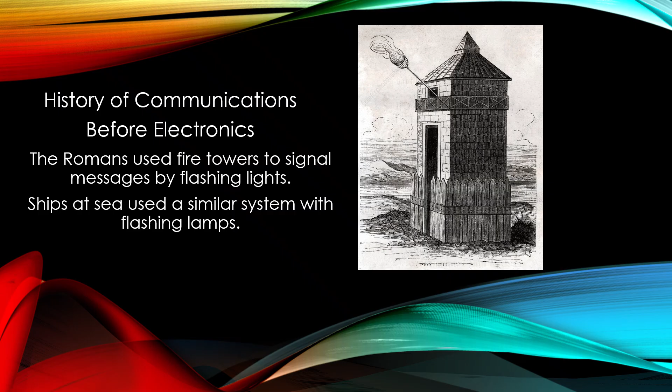Then the other guy would put his flame down and open up the water spout, so the water would start to drain and the post would start going down. When it got to the message he wanted, he would hold his flame up again, and the other guy at the other end would shut his water off. That way they could read the message, like we're okay, we need help, or whatever the message happened to be - they had several messages on there.

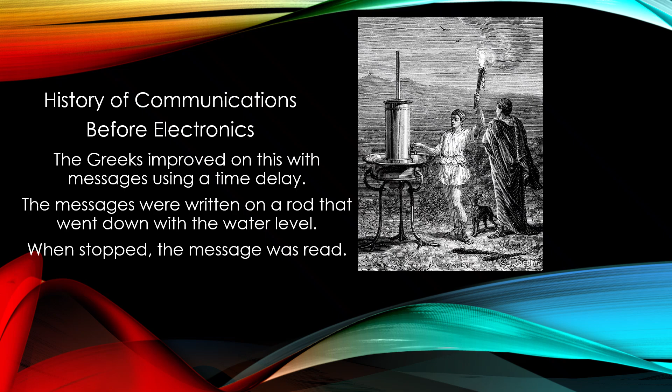Communications in ancient West Africa.

As a young boy growing up in New York, my neighbors came from Ghana, Africa. I liked to go over to their apartment and learn about the culture. They had some interesting drums that I liked. One day I was playing around with one and the husband said, 'Hey, he almost played a perfect six.' I thought, how can a drum be a number? And he taught me about talking drums, how they could communicate 5 to 8 kilometers with them. I never forgot what he taught me.

In Ghana, the Akan culture uses the fontomfrom, or talking drum. These could be quite large, like really large. Now they're doing some kind of festival here, and they're vertical. In actuality, the drums would be more simplistic. They'd be horizontally mounted, pointing toward where they want the sound to go, and both drum heads would be the same height, so the person could play the high and the low as they needed to communicate.

This started in Nigeria, went to Ghana, went to Benin, then to Mali, and moved across the country, and it was their main tool for communications for centuries. After that, it went to Afrobeat and jazz and contemporary music, and now it's more of a festival type of thing. I don't think they still use it for communications anymore, unless they're doing a reenactment or they want to show people how it works.

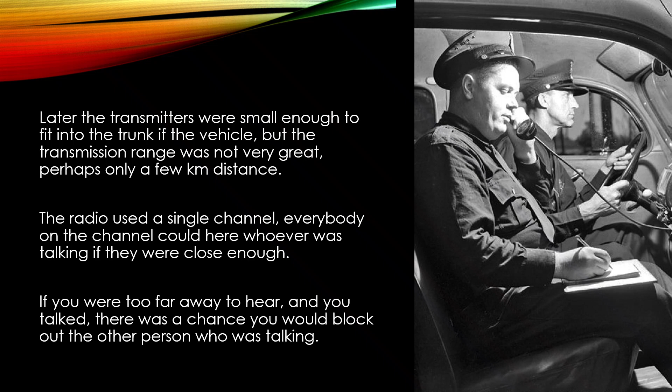Later, the transmitters were small enough to fit in the trunk of a vehicle, but the transmission range was not very great, perhaps a couple of kilometers at most. The radio used a single channel. Everybody on the channel could hear whoever was talking if they were close enough. But there's a problem: if they were too far away from one of the persons, they might not hear them, and when they talked, there was a chance you would block out the other person who was talking.

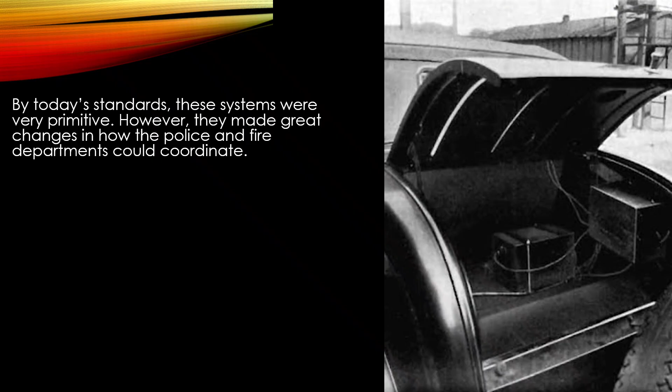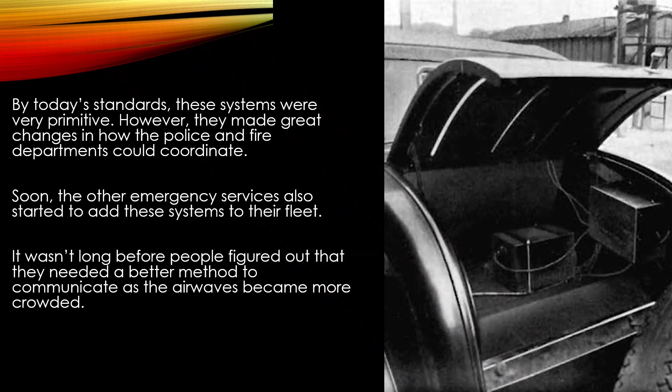By today's standards, these systems were very primitive. However, they made great changes in how the police and fire departments could coordinate. Soon, the other emergency services also started to add these systems to their fleet. It wasn't long before people figured out that they needed a better method to communicate as the airwaves became more crowded. It was determined that if frequencies were paired together, a new method of transmission could be used.

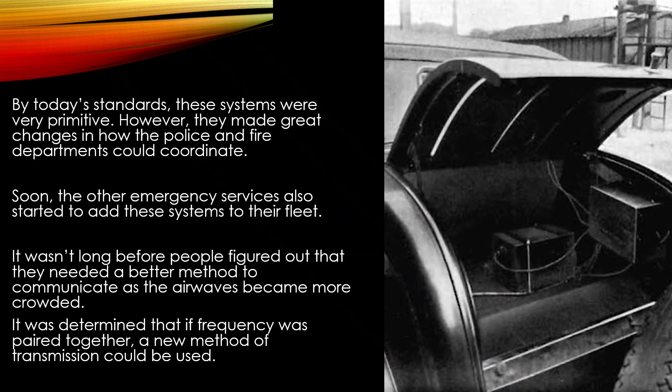Two-way radio communications use individual transmit and receive channel pairs. So we got signal pairs for better communications now. Instead of a single frequency radio, it evolved to have a transmit channel and a matching receive channel.

So you had a nearby town, and then you had some different town, and you wanted to talk back and forth. It was very possible that if you were here in the nearby town and trying to talk to the person in the other town, they wouldn't be able to hear it. So they have a transmitter, a big tower. What it would do is listen on one channel and broadcast on another. Then when the other person talked, he would broadcast on that listen channel, and it would broadcast it on the talk channel.

So the first car goes in and he makes a transmission. It's received by the tower on the receive channel. It's transmitted out on the transmit channel at a much higher power. This allows communications over a much larger distance with more clarity.

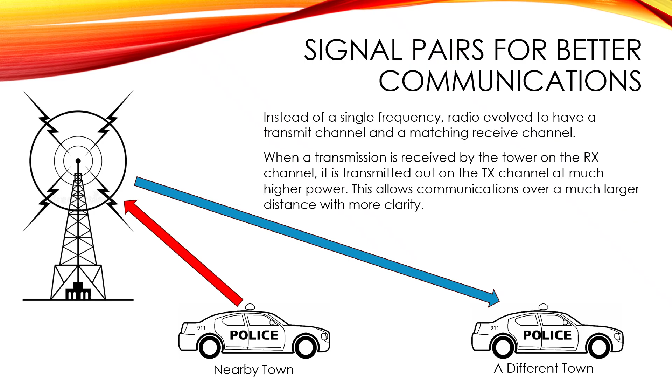When the car that's far away responds, the tower is very high and has very sensitive electronics on it, so it hears the transmission on the receive channel very clearly. Then it retransmits the signal on the transmit tower where both cars hear, and far can easily hear the communications. This is a better way to send the signals out.

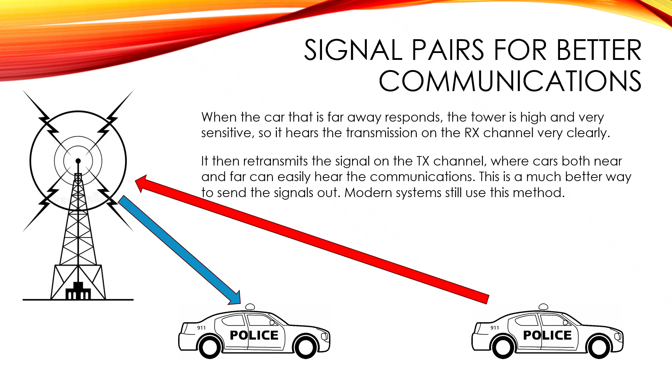Modern systems still use this method. So if you've got multiple police cars in one town and multiple police cars in the other, they can all talk back and forth as though they were close to each other. This requires one radio for the police, one radio for the fire, one radio for the EMS. It's a lot of radios. Bear that in mind, it'll become important later.

Modern radio systems can now transmit audio as digital information, which means it can be encrypted. This makes the communications private, so only the person or group that's supposed to hear it can have access. This is very important in the government, military, and police units. Fire and ambulance units also use encryption to prevent agencies like the news from releasing information that's private or confidential.

So if there's some politician or actor or something like that who's got a problem, they may not want everybody to know about it. They don't want the news to be able to listen in on their communications and hear what's going on. Obviously, you don't want the bad guys with a scanner to be able to listen in to the police and say, oh, they're two blocks away, we still have time. So now they have digital encrypted audio, which means there's a lot more safety involved for everybody using the system, and it's a lot more private.

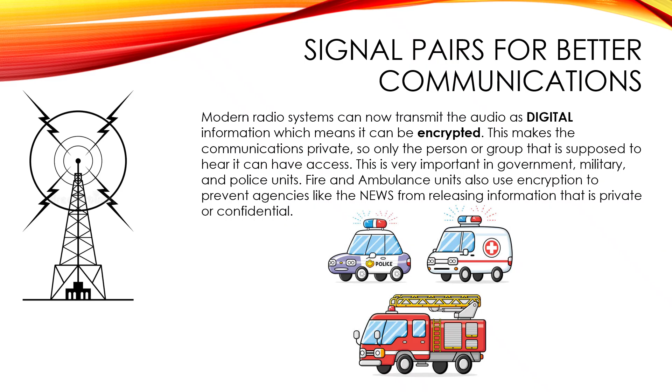Now we're going to talk about trunking radio systems, using a computer system to control radio traffic. So imagine this: you've got a couple of different radios, radio transmitters, and what happens if one of them breaks? If it's the police, for example, now all of a sudden they don't have their communications. That could be a big problem. Let's look into that.

We've learned that radio evolved to have a transmit channel and a receive channel as a working pair. But think about what would happen if the police radio failed. They would not have communications. The other departments would be able to talk, but the police would have a serious disadvantage. Another consideration is that one agency might be very busy, while another agency is currently just sitting there idle. The other channel would have been very useful if both agencies could somehow share that resource, especially the police department that has a broken radio right now.

It would also mean, in the event of a failure, the calls could be routed through the functional radio and they wouldn't lose the communications.

So let's take a look at the basic concept. This is a modern radio system. This is what a single modern radio transmitter looks like. It contains a power supply, a processor, receive circuits, a transmitter, and a power amplifier. It's a very powerful unit capable of between 50 to 150 watts of power. A standard portable radio, for example, is typically 2 watts, and that'll give you a comparison.

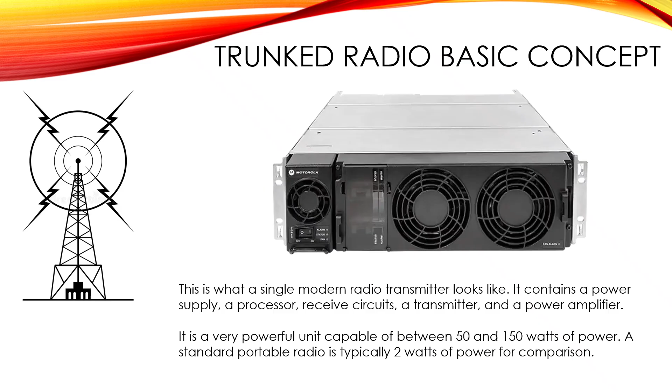Now let's look at the rack. This one is a Motorola rack, and I do a lot of work with them, but there are other vendors that are slightly different, though they have the same basic components.

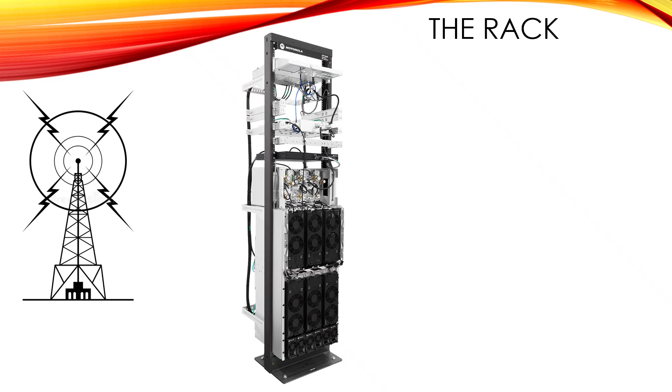That's the rack. You've got a receiver multi-coupler. When the signal comes in from the tower, this has an amplifier to amplify it up and clear it up. You've got a duplexer and mixer, transmit circuitry and receiver circuitry. They've got to be mixed together for when it gets sent back up the tower.

You have a controller. It handles, like a traffic cop, the traffic between all these different units. You have a combiner. Below, you can see there are 6 big radios, and it takes the signals from each one and mixes them together so they can use that single antenna on top of the tower. And these, of course, are the repeaters.

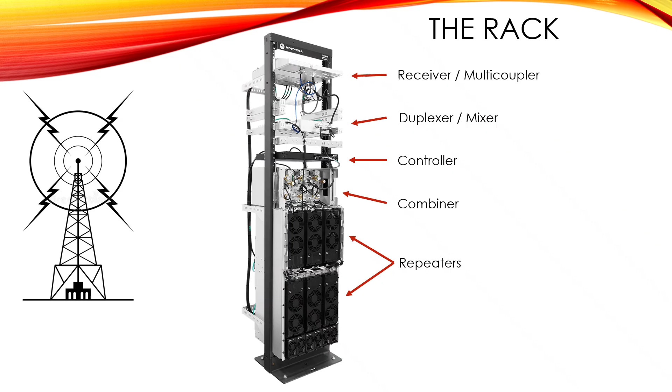Those are the power supplies for the repeaters. They all connect up to the tower, and the radio communications go back and forth through the cable into the rack.

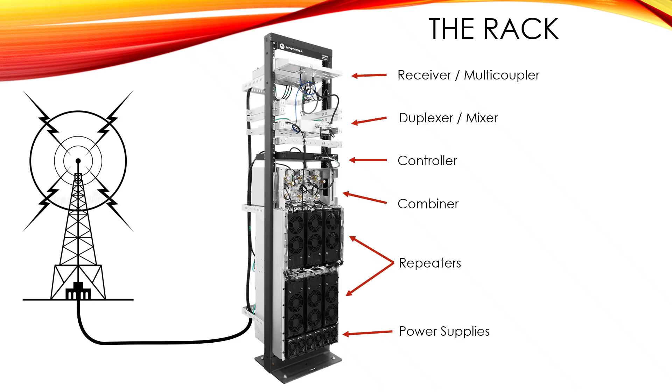Now, some sites have more than one rack. You can have as many as 21 channels for one system at one location. Let's look at how it works.

When the radio is turned on, it looks for a control channel and affiliates with that site. You've got a certain number of channels at the site, and one of them is designated as a control channel, and it sends out a signal that basically says, I am system number 1234, I am here. The radio is familiar with the control channel, so it logs on and says, I know what tower I'm next to, I know how to communicate with this tower.

During communications, it's no longer locked to a single channel. It's not like the police have a channel and the fire department has a channel and so forth. They all share all the channels now, and what they do is make talk groups. So let's say police might be number 200, fire might be 300, and so forth.

If you wanted to talk to the police, which was group 200, your radio would, when you keyed it up, say, hey, I'm unit number 45680, and I want to talk to the police on talk group 200. The controller sends a command that says, okay, everybody in group 200, somebody wants to talk to you now. Go to channel 3, because channel 3 wasn't being used.

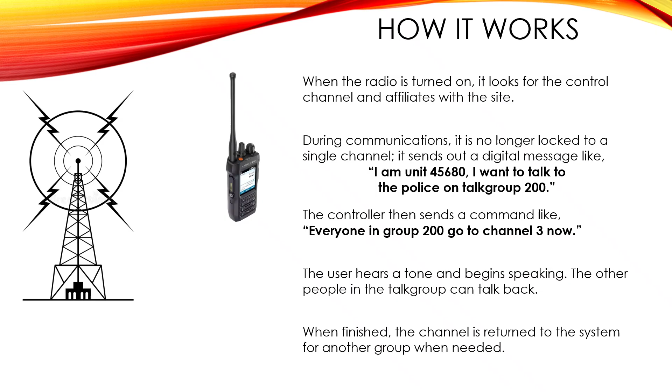Now let's look at a distributed antenna system. What is a DAS and why is it important?

You probably realize that if you have a large building made out of brick, stone, and concrete, it's going to block some radio signals.

If there's poor coverage in a structure, in an emergency, people may be injured or killed if first responders can't get to them and if they cannot communicate properly. Imagine, for example, a firefighter who gets pinned under a fallen piece of the building. They can't move, it's hard to see, and there's smoke everywhere. If they do not have the ability to call for help, and if help can't communicate, the person may lose their life.

My job is to prevent that from happening. We need to design a system to prevent that from happening.

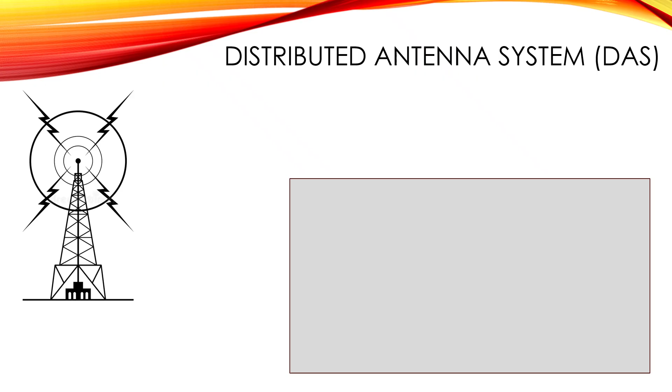So distributed antenna systems, also known as DAS. Let's start off with a building. Pretend it's some big courthouse or a school or some place that's very important to us that's going to have a lot of people in there. And when we test it, we go in there with a radio and it just does not work. We need to do something about that.

Well, the first thing we do is we put in what's called a BDA. That's a bidirectional amplifier. It can take the signal from the tower, amplify it, filter it, and then send it out. And it can also take the signal from inside the building, amplify it, filter it, and send it back.

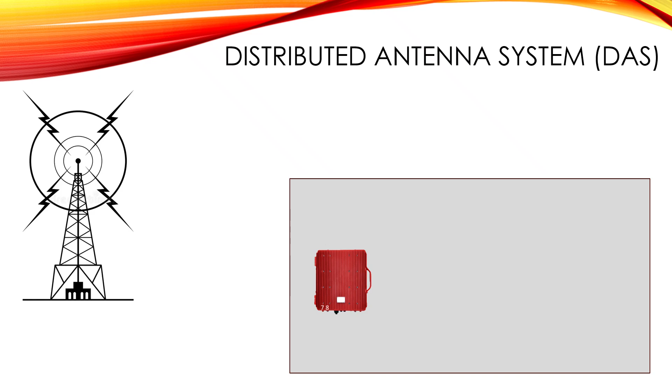But we need some other stuff to make it all work. So we run a cable up toward the roof, but we think, wait a minute, if we put an antenna out there and lightning hits nearby or something, that pulse of energy could come in and destroy our equipment. Let's put a surge protector in there to stop that from happening. Make sure it's grounded. Now, if you get a surge, it's not going to get in.

Then we're going to put an antenna up on the roof. And this is not your regular antenna. You see how long it is? It directs the signal like a beam, like a flashlight beam, because we don't need it going everywhere. We need it to go to the tower. We need as much of the signal as we can to go to the tower. We also need it to be the most sensitive in the direction of the tower. We don't want a lot of radio signals from other directions getting in here.

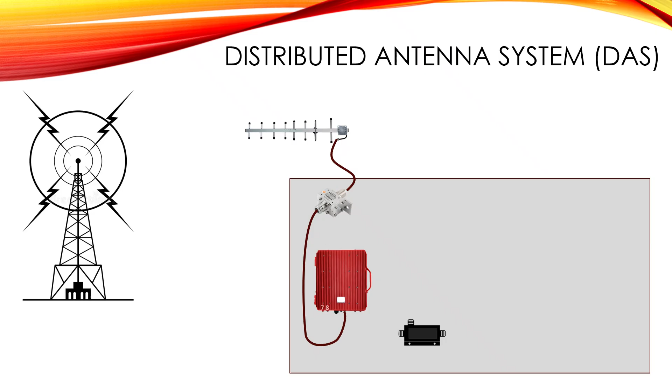So we connect that up. Now we're going to look at the output. Well, we're going to have more than one antenna. In here, let's say we have two antennas, so we're going to need something to split that signal up. We use something called a directional coupler. They're kind of interesting because they can send a certain amount of power out one port and the remainder out the other. Imagine if you had a big gymnasium and then you had a small office. You would need more signal for that big gymnasium than you need for that little office. So we can use these to determine the correct amount and make sure it gets where it wants to be.

We hook that up to the amplifier, the signal comes in. We say, okay, we're going to have one of these located in the office, one of these located in the gym. Let's wire them up. So now you've got our distributed antenna system.

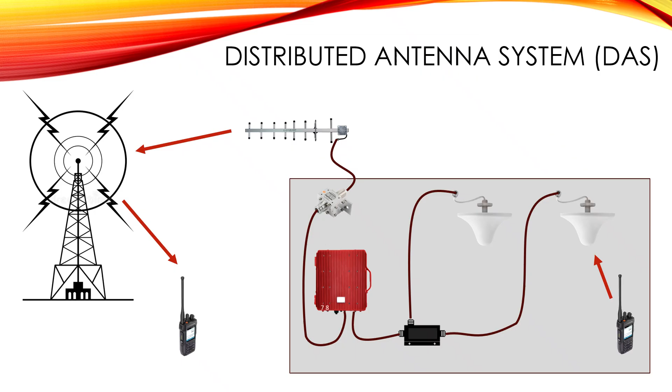The user comes in and he needs to talk. Well, before he couldn't talk, remember? There's somebody outside he needs to talk to. But now the signal can go through the system, out the antenna to the site, and back to this person that we're trying to talk to. And then when they talk, the signals trace back the other way, and the person inside can hear it very well. And if we do our job properly, there's as much signal inside the building as there would be outside, almost like the building didn't exist.

Now, I'm using something called IBWave. It's software that allows me to take the building and design a model of the building and then put equipment in it and test it out.

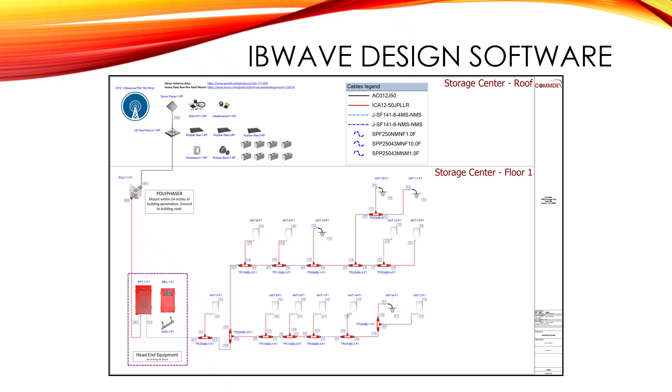And then after that, you can see we've got the splitters going to all the different antennas throughout the building. This is a fairly large building, so we needed more than just two antennas.

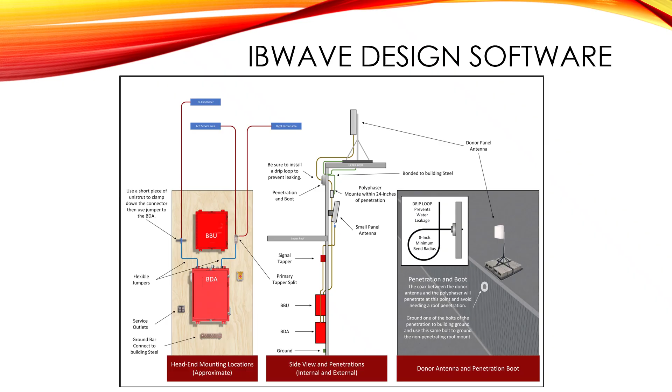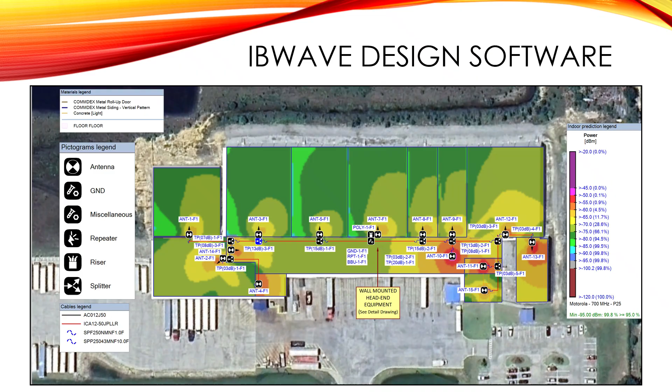Now let's take a look at what this software can really do.

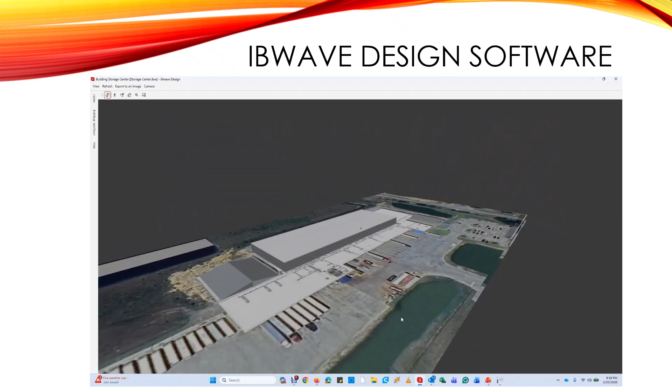When we do these designs, we make a three-dimensional model of what we're working on. For example, here you can see what the structure looks like, and the model is very, very detailed. I can actually go in and remove the roof, and then we can see exactly how the signal is going to behave inside the building.

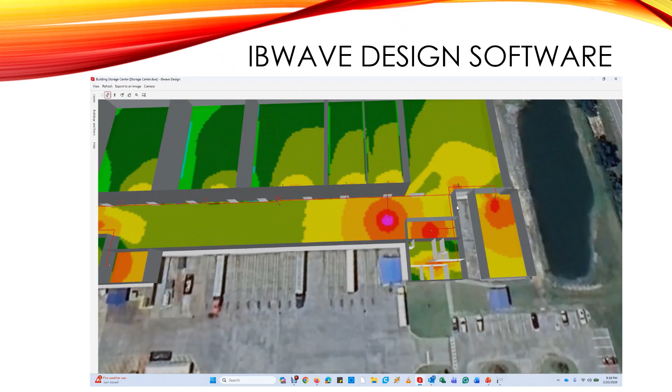You'll see that we've got all of the different walls drawn in, all of the cables, and where all the antennas are. So we go into this and pre-plan how everything is going to go. You can see how we've got the antennas and where they're going to point. That way, we know exactly how well this is going to work before we ever even build it.

And that's what you do when you do your job right.